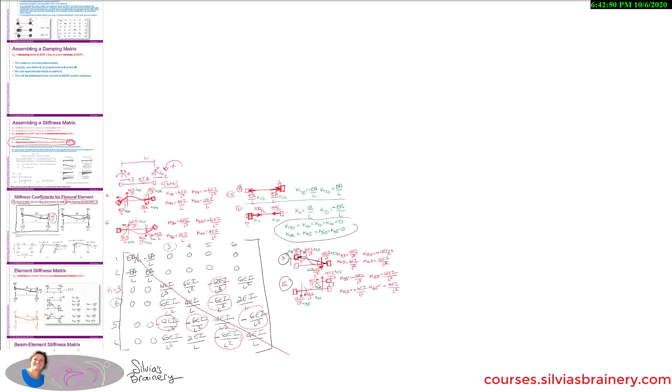So what I want to do in this video is the mother of all examples so that I don't have to spend so much time trying to get this done. I'm gonna do it cold and I hope I get it right. That's all I can say, but at least it's about the process, all right?

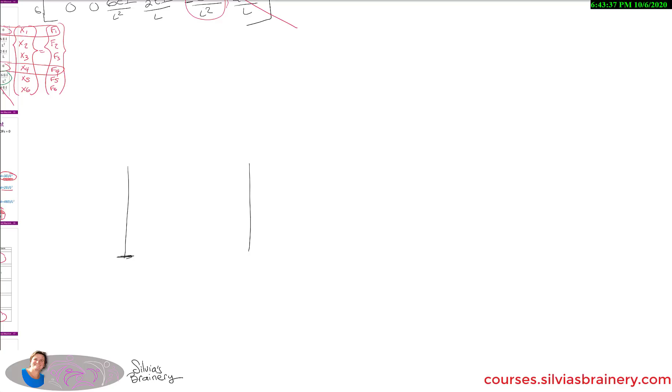So we're gonna do a 2-story frame, but it's gonna have all kinds of boundary conditions and connections and joints and things like that. Let's make the boundary conditions be: fixed at one end of the column, and pinned at the other end. We're gonna put hinges in this beam here, but a rigid connection here. The column spans all the way up with a rigid connection here, and then I don't even know if this is stable, and a system that looks like this. Yeah, it's good enough.

Oh, this is gonna be fun. I wonder if I can just uncouple them, but anyways, let me stretch that, draw this out just right. Just have to make sure that you don't have a mechanism, but this is almost like a cantilever and it's fixed here, so I'm comfortable with this system. And then the system here, it doesn't matter because it's connected to that one, so I think we're okay, and it's not statically determinate.

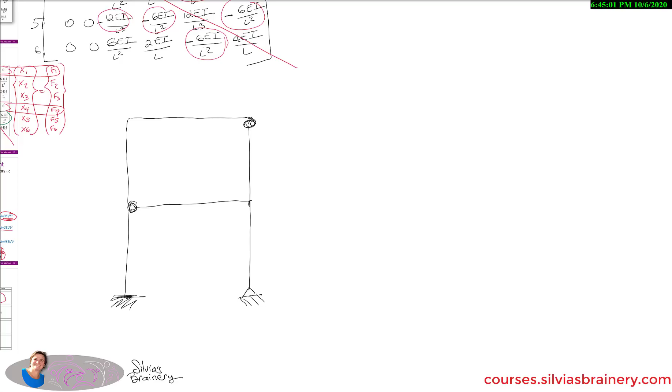I'm gonna make it that much interesting that I've got the I of the beam. You know what? Let's just call everything E's and I's, all right? Don't make my life that much complicated, because then those don't really matter, it just makes my equations that much longer. So everything is E, A, I, and L, all right? Everything is going to be a length, L from here to here, L, and this is L here. What really matters is the geometry here that I'm interested in.

So I'm going to include all degrees of freedom because that's just who I am. And my beams are not... could make one, oh let's do that. Okay, we're going to make this beam actually rigid. So I've got 1 degree of freedom less than I want. And oh, do I want to make that beam infinitely flexible? I'm just afraid that my system is going to collapse if I do that. So now I've got enough constraints here, okay?

So this is A is equal to infinity. So what are my degrees of freedom? At the base, I don't worry about those degrees of freedom. I'm going to take 1, 2, and then this is actually 3.

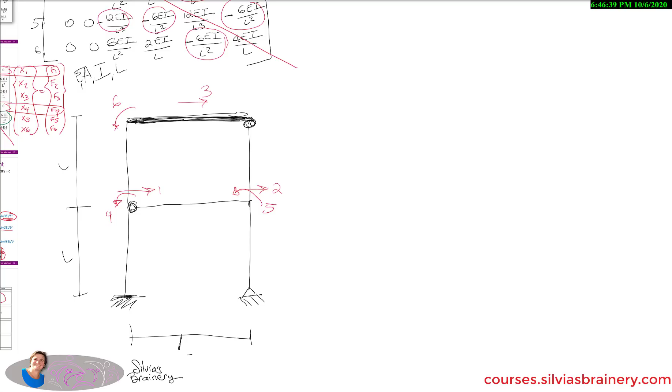1, 2, and 3. I'm going to do my rotations, rotation here. Whoa, 1, 2, 3, 4, 5, 6. And those are actually 2 rotations. And I actually don't even care about that rotation because, oh, and by the way, this is just A is equal to infinity, okay? It's not the EA. It's the only one just for this element here, okay?

And then let's just assign that as degree of freedom 7. All right, so we're going to go through. What I'm going to do is I'm going to show you all the coefficients and how we're going to compute them, but I'm not going to literally assemble the stiffness matrix in the end.

So let's deal with degree of freedom 1, and let's draw the deformed shape of degree of freedom 1. So what I like to do is I first draw the regular frame. It's going to be right here. And then I'm going to impose a displacement of 1 at degree of freedom 1. And then these guys are all going to stay where they are. This one's moving over here from where it was over here. No rotations or anything, all right?

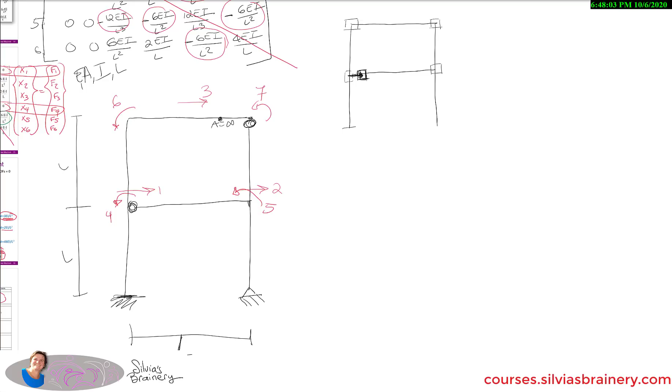So what are the forces acting here? Well, this is actually reduced. I now have to draw this guy here, and it's fixed over here, so I have no rotation here. I have this here, and I'm going to draw a deformed shape like this. This node here, I have a rigid joint, therefore it doesn't rotate here nor there. These all kind of stay the same. Actually, here's a pin, so it doesn't really matter.

And then here was a pin there, but the beam is pinned to it. So right now, for this degree of freedom, nothing matters there. And this is what the deformed configuration looks like. So this is for 1. I'm actually just going to do that as the first step. The degree of freedom 2 is going to be something similar but different. Actually, yeah, I'm going to draw the frame for 2.

Oh, I could just copy it. That's true. Now this is fixed here, but I actually do have a pin here. And therefore I take these nodes, and all these nodes are all going to stay where they are, except for this node that I'm going to translate 1 over.

What's happening here? Very important to keep track of what's happening here, especially with these, since I have a pin here and a pin here. So this guy's moved over, therefore I do have an elongation at this point. This rotation is actually free to move. So this is going to be the deformed configuration there. And interestingly, this is the deformed configuration here as well. This is a right angle, but this one doesn't have to be because it's pinned. Same thing at the top. And then everything else stays the same.

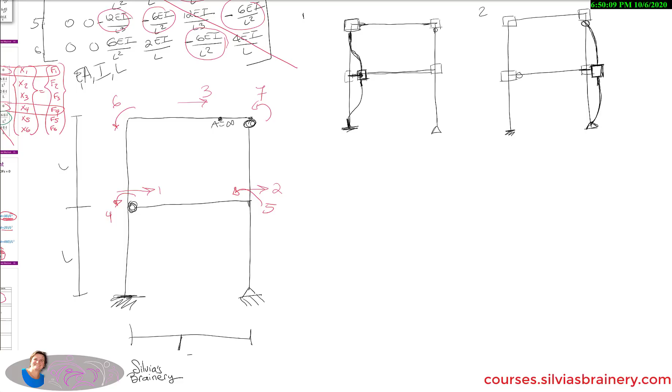Let's go to degree of freedom 1, 2, 3. I'm going to do degree of freedom 3. I'll just do it over here as well. My paper won't let me go all the way. Fixed, pinned. These nodes all stay.

Now, because I've got an axially rigid beam, this whole top floor must move over to the right together. And because it's got a connection there, that node can't rotate. Same thing with this node over here, it has only moved. Now I've got fixed here, so I've got an angle here and an angle here. That's what this deformed shape is going to look like. These two guys have moved together at the same amount. And there's no rotations there, so I don't have to deal with anything.

What happens here? Well, this now is the same thing. I have a pin here, so this is almost like an upside down cantilever, which is exactly the opposite almost of what I had here. And then this doesn't move.

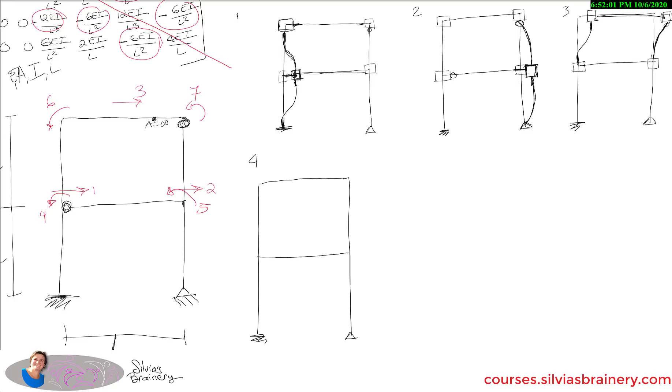1, 2, and 3. So where's degree of freedom 4? Oh, now we start having fun. So now we've got rotations. Yes, I am trying to make this all fit into one row, but I'm not sure I'm going to be able to make that happen. Remember, because I have a pin there and a pin there, and then I have a pin here. So degree of freedom 4 is going to rotate.

So this guy here, maybe it's easier if I draw it as a rectangle. This guy's going to have to rotate counterclockwise this much. This is where the column now is because it's rotated 1. This is where the column is now. This guy needs to stay, and same with this guy. So what this is going to look like is that deformed shape. This is fixed here.

Whoa! There it is. I left that behind, didn't I? On purpose. This guy's here.

This guy, I have a pin here. It doesn't matter what this is going to look like. And so what this is going to do, what the heck is this going to do? Ah, this is just going to stay here. If this doesn't deform and it rotates,

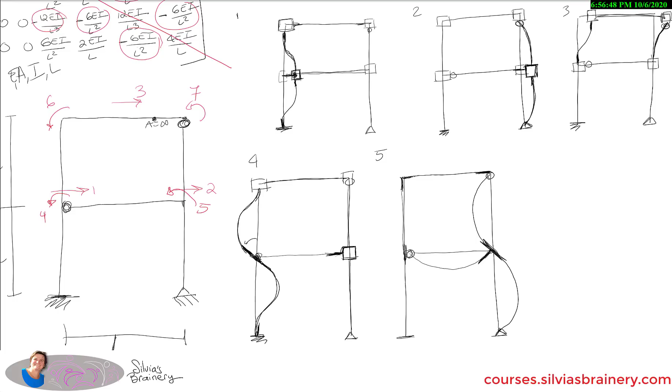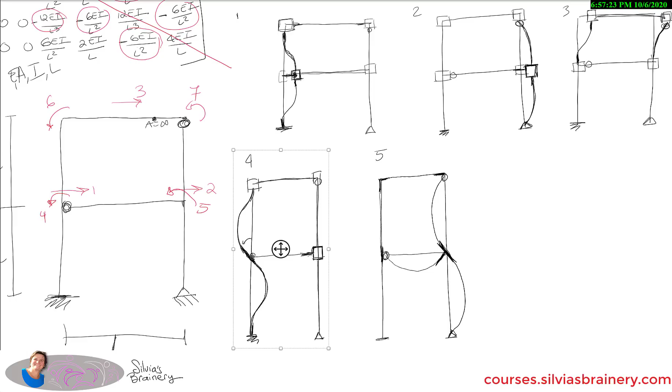Oh, this is so cool. All right, and then, oh, how am I going to fit 2 more in there? 6 and 7, all right. Oh, look at this, I can take this guy here now that he's done, and I'm going to move him over a little bit. Okay, good. Can I squish him in a little bit? Oh, look at that. No, stay. Handy, yes, I'm having a lot of fun with this. There it is, move over. This makes up for my needing space when I work, but not afterwards. All right, I got way too much room.

You gonna write? Pen, pen. All right, I'm gonna make this wide if I want. Oh, how did? Yes, for somebody who doesn't know how to draw straight lines, I sure am picky. But it needs to look right. It's so important because I base everything on visual. Fine, this is good enough.

All right, where's our degree of freedom 6? It's over here, so we're going to take this joint and rotate it counterclockwise to look like this. All the other joints are going to stay. Now here's a tricky one, because we have a pin, right? And so then this should be free to rotate, but no, because I've assigned a degree of freedom there. So that guy is not going to translate, or is not going to rotate. And we know it's not going to translate because degree of freedom 3 is fixed. So this guy's going to be here. We have a pin, this joint stays the way it's supposed to be. Same with this joint and everything else. So what we have here is this and this. And that's all there is to degree of freedom 6.

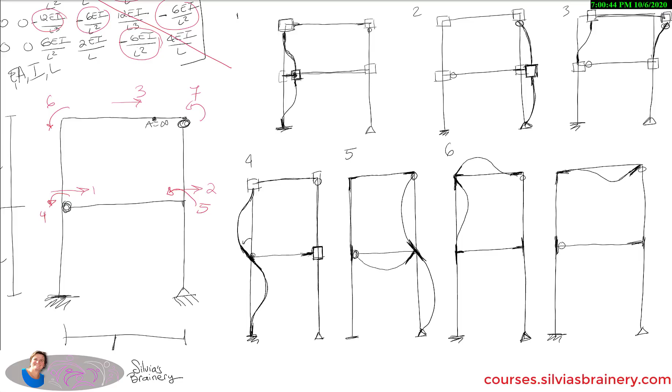Okay, so now we need to find out what our forces are, and we're going to have to go and pull out our table. So let's do these one at a time. And the figure that I'm going to pull out first is going to be this. So I don't know how to copy something over that's not an object. Because I can't... oops. Can I grab this? Nope. There's got to be a way of...

Ink to shape, shapes. Well, I'm just going to draw it again. There I am. So then I can take these objects. So if... oh, but I need to use the right pencil. Okay, let's go with red only because it stands out. So if we have this type of system where we then deform it downward, this is what our deformed configuration looks like. Ouch.

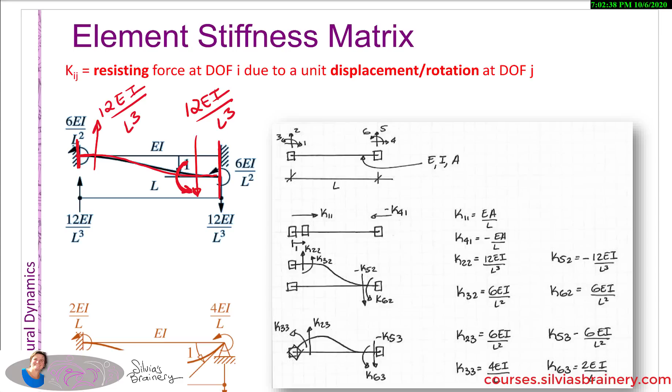And it's actually good this way because then I get to draw it the way I like it. The force here and here are going to be 6 EI over L cubed. No, they're not, are they? They're going to be 12 EI over L cubed. This is going to be 12 EI over L cubed. The moment, this, I needed a force to push this down, and therefore I have a force pushing this up to keep it in place, and equal and opposite. The moment is here so that I can keep this rotation angle 0. So I have a moment in this direction, that's going to be 6 EI over L squared. And I have a moment here that's 6 EI over L squared.

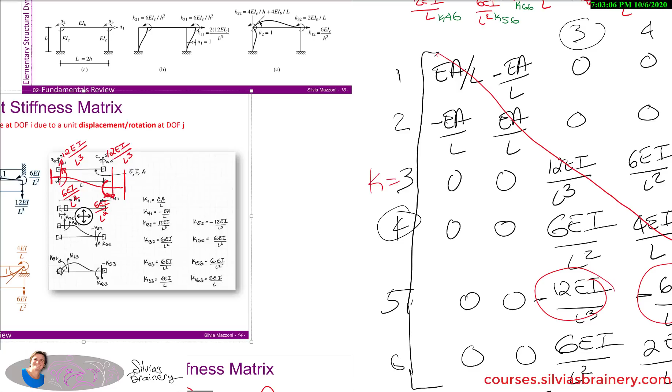All right, I'm going to grab these equations, or what I've drawn. I could make them a different color, but that would just be way too much work. No, no, no, that. Oh, look at that, I've just taken that with me. But no, let's not do that. I did so much work to make these look really good. So, no.

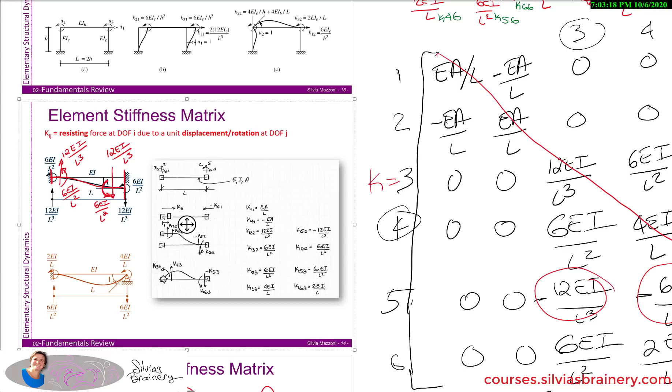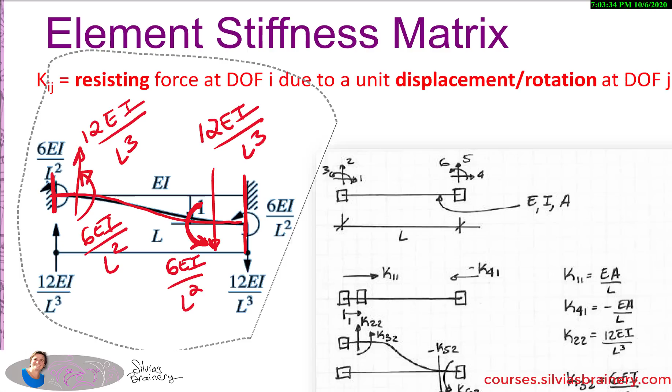I need to select something else. I don't want to select that. I think I need to go here with my little arrow. Select this, guys. Now I'm going to zoom out.

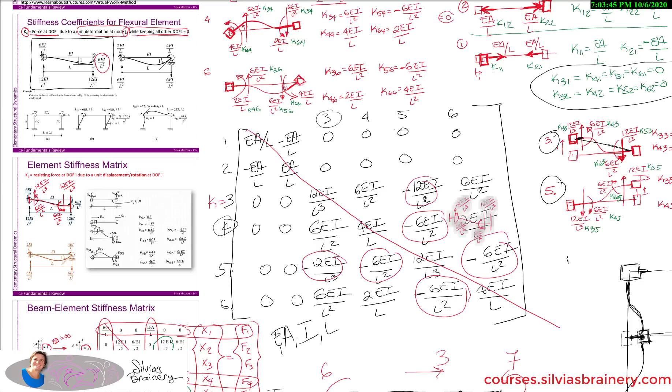I had all that room to the right. I'm going to take these over to here. So let's find out here, where is it that I need these kind of forces?

Aha, right here. So I have a force here and a force here. I have a moment in this direction and a moment in this direction.

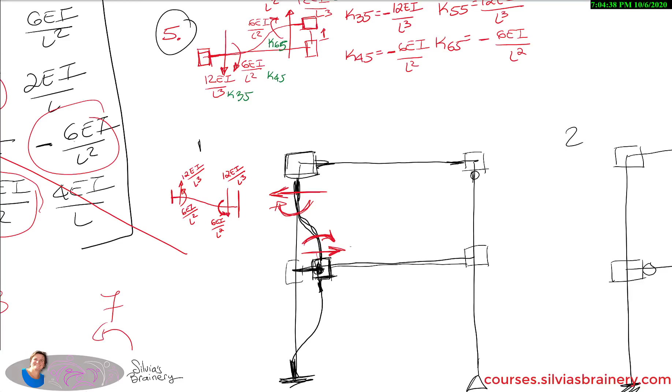I don't care what the figure over there looks like. I know that I need a force to displace it here. Therefore, I have a force in the equal and opposite direction there, and this moment is there. Otherwise, this would form a straight line, so these two moments need to keep it in the right shape, where I have zero rotations.

Just by symmetry and intuition, I have a force here and a force here, but I don't care. And I have a moment here. I don't care here because that's not part of my stiffness matrix. It's a constraint degree of freedom.

So these values are going to have 6 as the moment and 12 as the forces. So this is 6 EI column over L column cubed, because I'm not going to put them in, so at least you'll know L column 1. So it could be something different.

And this is 12 EI column over L column 1 cubed. This is, so if this is L1 and this is L2, and blah blah blah, then this force here is going to be 12 EI column, I could even say column 2 over L column 2. So this is column 1 and column 2 cubed. And this is 6 EI column 2 over L column 2 squared.

Same thing with this. This is going to be 12 EI column 2 over L column 2 cubed. And this is 6 EI column 2 over L column 2 squared.

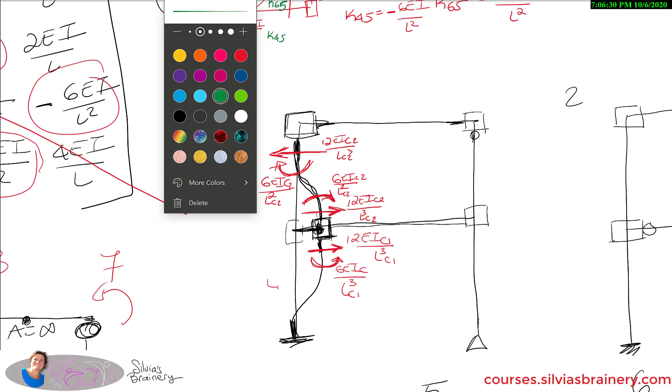What I'm going to do is put sign conventions right away. Let me find a different color. Green is the same color as red for colorblind folks, so I'm going to go blue. So this here is negative, this here is negative, this here is negative. And this here is positive, this here is positive, this here is positive.

So what do you do at a joint? What this is telling me - and I'm not going to do all of them, I know you're going to get the pattern here - this is degree of freedom 1.

So K11 is going to be, the combination is going to be equal to 12 EI column 1 over L column 1 cubed, plus - you've got to sum all the forces that correspond to degree of freedom 1 - plus 12 EI column 2 over L column 2 cubed.

And that one's easy. Now, what degree of freedom is this? Oh, I forgot, another force. What's another force that's acting on here? Haha, I did this on purpose and then I forgot.

We also have a force here of EA beam over L beam. And this is there, and then this node would move to the right as we're moving that one. So this force here is also in this direction. And so to this K11, you would also add plus EA beam over L beam. See that?

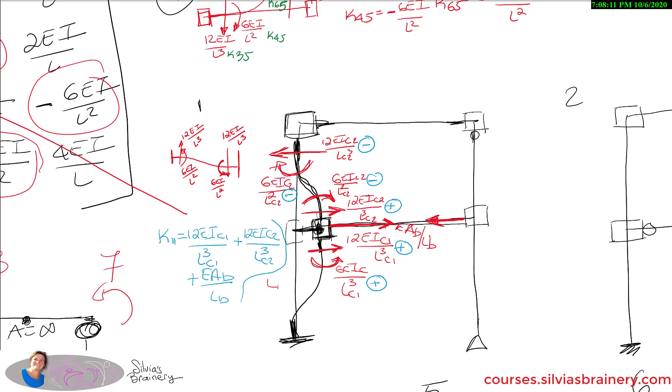So this is all K11. K, whatever degree of freedom that is. So K21, this is K21. K21 is going to be equal to negative EA beam over L beam, which is - that's K2. I'm trying to figure out what that degree of freedom is.

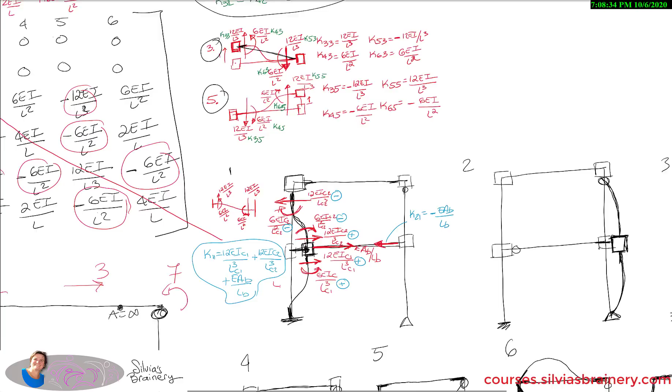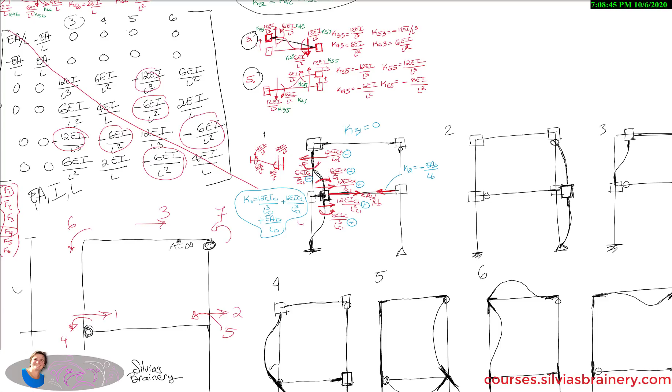1, 2. So K3 is 0. K31 equals 0. K41 gets fun. K41 is equal to the sum of the moments. Well, one's a plus and one's a negative. So it's going to be 6 EI column 1 over L column 1 cubed minus 6 EI column 2 over L column 2 cubed.

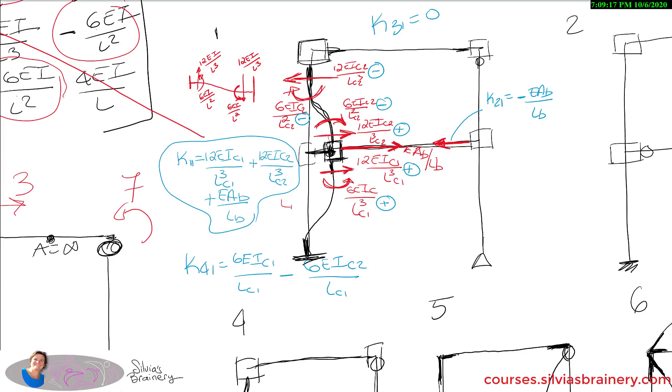Is it cubed or squared? It should be squared, yep. I can erase this - I like the idea of having a pen that is erasable. So that's K41. Where's 5? K51 is 0.

And K61 is... oh wait, I do have a... K31 is not equal to 0. K31 is actually this value. So it's negative 12 EI column 2 over L column 2 cubed. And then...

K51 to 6. K61 is equal to this moment, and it's negative 6 EI column 2 over L column 2 squared. That's it, 7. And then K71 equals 0. We got them all.

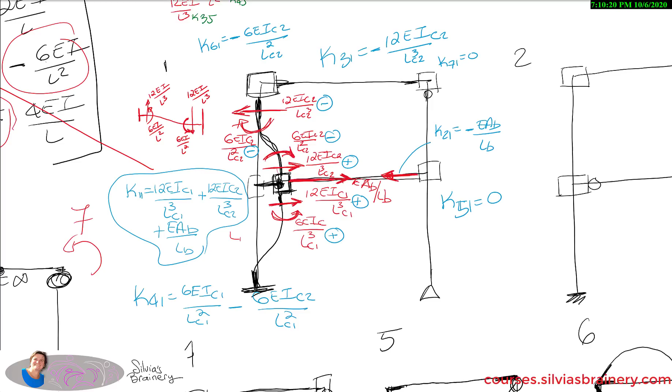All right, well let's move on to the next ones here. What are these forces here? Well, this is when we pull out a different equation book. Don't let me forget that there's a force. Let's put this one in right away before I forget.

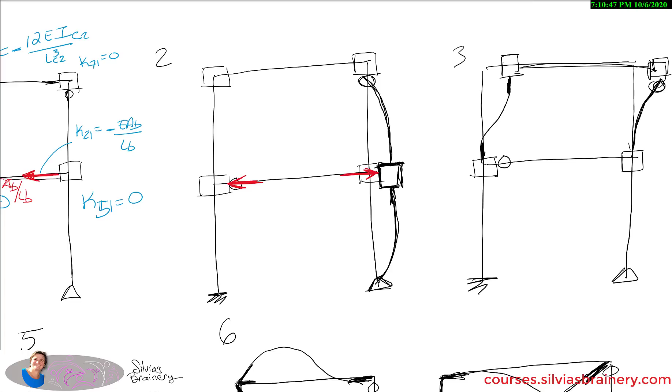So this force here pushes it out. This guy will go with it. And therefore there's a force of that. That's EA, okay?

Where am I? I see, what I need to know is what is the force here, and we can kind of already know what it looks like. There's a force that's going to be here and a force that's going to be there, and a moment that keeps it that way.

And see, then here I'm like, okay, what is the direction of this moment? It's got to be in this direction, only because the two moments have to cancel each other out.

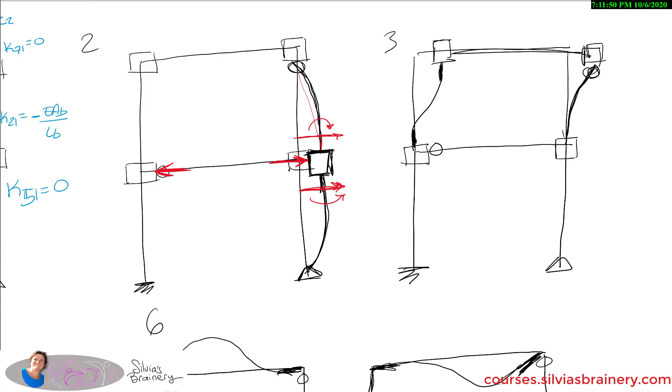Or not, I don't know. I would think... no, they don't have to, because there is a resultant moment actually at that spot. But it's a way of, if this goes up, this would actually move like this, and therefore I have to apply a moment here that's going to make this angle go at a right angle. So that's why that force there is in that direction.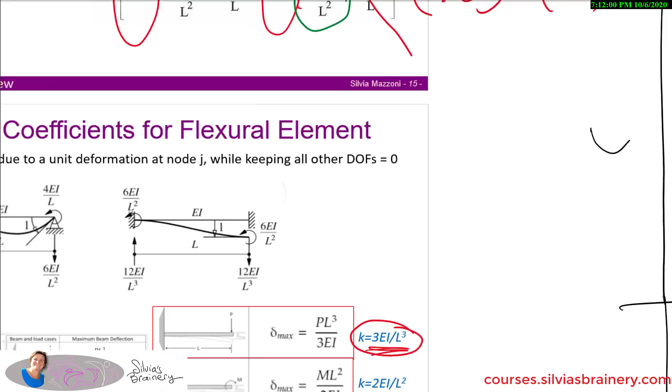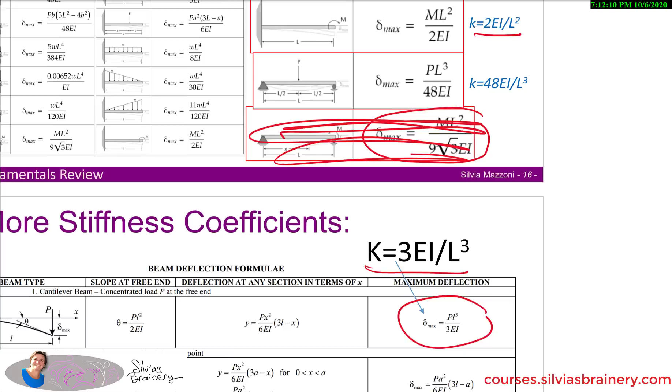So this is when you go to your other resources, other tables, because this system here doesn't quite fit. This is that 3EI over L cubed, which is hard to see it here. And I don't actually think that that's the one you want to deal with, but yeah, it is the same one. Okay, because this is the same deformed configuration as what we have over there. You've got a fix at one point and then free to rotate at the other.

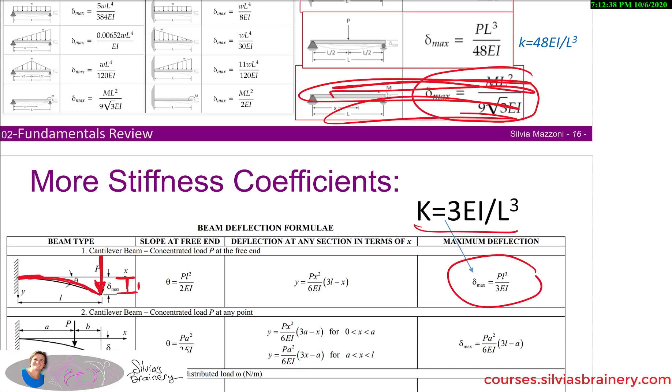We have a deflection of one here, and therefore the force here is going to be equal and opposite to the force here. So if this is P, and that's equal to 1, I'm going to show you how I'm going to get P. Then this is also P here. If this is P there, then the moment there is P times L for equilibrium.

All right, but now we got, what is P here? Well, we know that the deflection delta is equal to PL cubed over 3EI. Therefore, the force is going to be 3EI over L cubed, which is equal to the force. That's the shear force, okay?

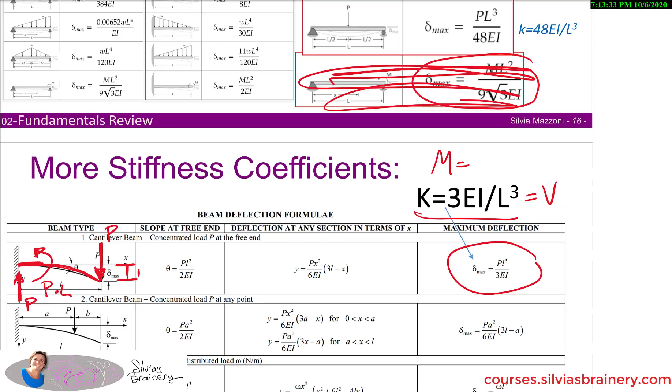Or let's just call it a V. The moment is going to be equal to this times that, so it's 3EI over L squared. And I think you can do that by...

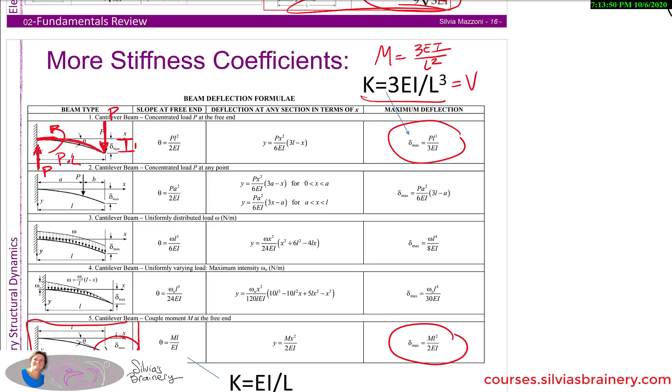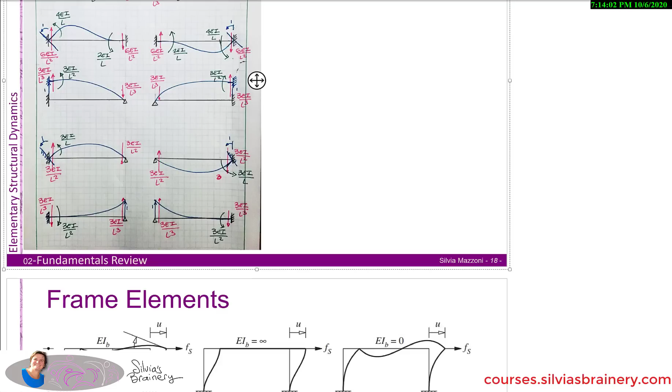Oh my gosh, I don't have this, because I think you have to do the one for the rotation, and I don't think I have that option, because that's why I put these into this sheet here. That's kind of like a summary of it, but it's pretty much what this looks like is so we have to find this configuration.

You can find this in tables online, all right, but it's the same kind of concept that I had there. So when you have a zero deflection and a free rotation at the other end, okay, so when you start with something like this... I'm really good at tracing my own things. So then the force is going to be 3EI over L cubed, and the moment is 3EI over L squared.

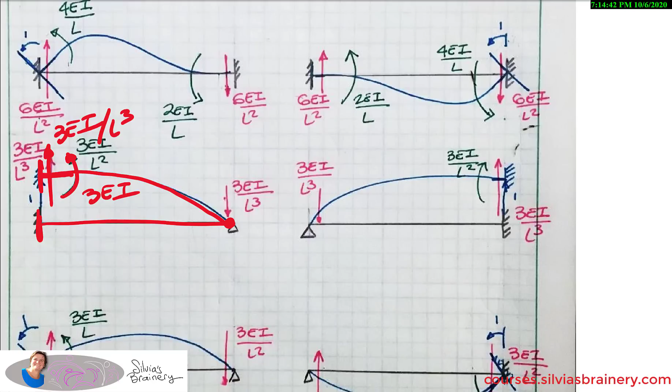So let's grab this, zoom out. Oh no, and I lost it. Now I've got the whole figure, so let's do that again. What have I done? Did I move it? Yes, I did, that's what I was afraid I'd done.

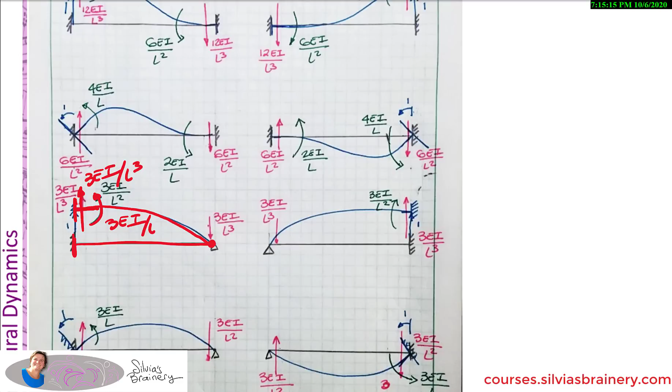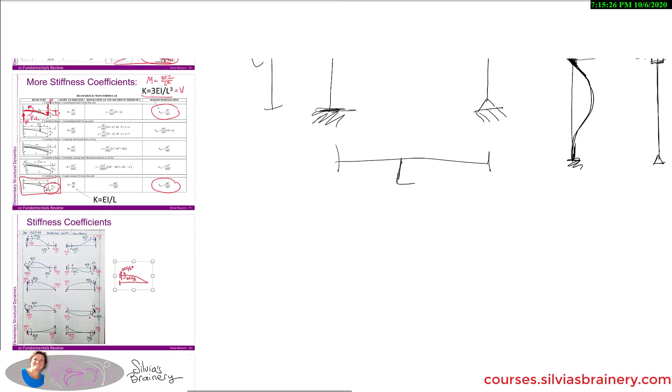Okay, so I'm going to zoom in right here. I'm going to grab it. What's there? I'm going to first move it out here, then it's easier to deal with. Then I'm going to move it to where I want it. It's so tiny. It's okay, I can make it bigger. Is there a... oh, I wanted it over there. Yep.

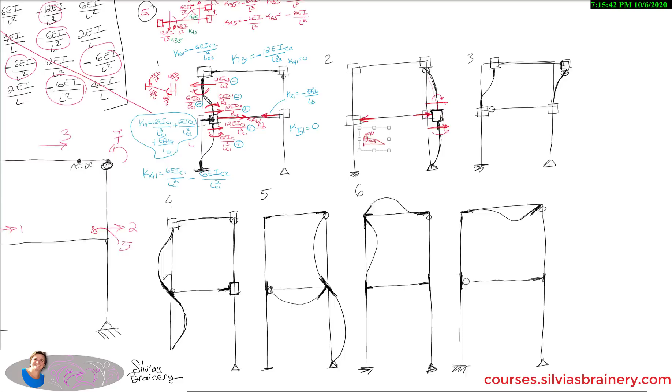All right, and this is relatively easy to remember anyways. So the force here is going to be... whoa, that should be squared, stop. Because it's just P times L, just based on equilibrium. This is also P, but we don't care.

Oh yeah, this is also 3EI over L cubed, all right? We don't care about the force here, but we know the moment is going to be 3EI over L squared. The force here, and this is column 1, this is 3EI column 1 over L column 1 cubed.

Here the force is 3EI over L column 2 cubed. This is column 2, and this is 3EI column 2 over L column 2 squared. But we also have a force here, because otherwise this would have been different, so we do have a force acting here that's equal to 3EI column 2 over L column 2 cubed.

Signs: this is negative because it's clockwise. This is positive, which is better be positive. This is EA beam over L beam.

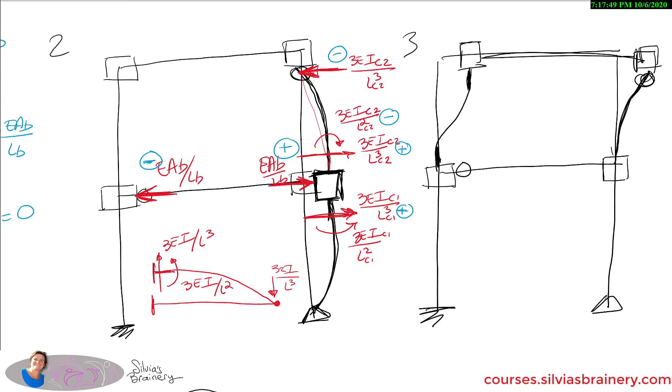Very good. Over there, we're going to need... where did I put it? This guy here. I think we can just see it from here.

At this point, I'm hoping you're familiar with this. We got a force here and a force there, a bending moment here and a bending moment there. Here we've got a force, so we have a force here and a force there. There's nothing from the beam because it's all moving together, and there's a moment here.

Nothing here, nothing elsewhere. So this is going to be 3EI over L squared. This is 3EI over L cubed. This is 3EI over L cubed. And this is going to be 12EI over L cubed. And these two are going to be 6EI over L squared.

Sign conventions. Positive. This is positive. Why is this force at an angle? I don't like this force at an angle.

Force is in this direction, therefore it's negative. This force is negative. This force is counterclockwise, it's positive. And this force here is positive, and better be, because that's a degree of freedom that we're moving.

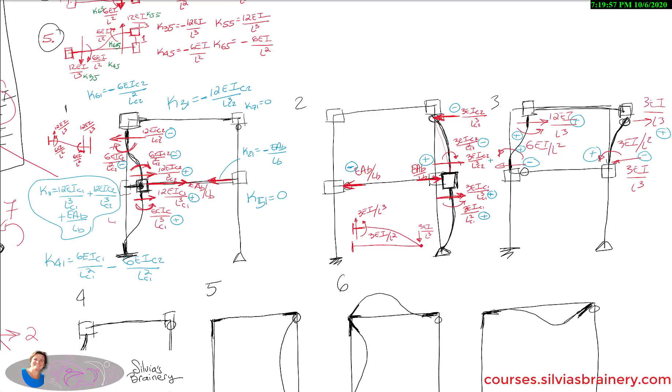So for the beam, for the degree of freedom here, it's 1, 2, and 3. Degree of freedom 7, for example, will be this value. It's a good exercise if you want, or at least just make sure you could do this part blindly, because you're never going to have as complicated a problem as I've set up right here.

Oh, I did have all this room to the right, so what I'm going to do is grab this guy and move him over. Let's see if I can do this like this. Can I stretch you? Yeah, okay, there it is. And I didn't write... whoa, what have I done? Okay, I haven't saved this at all, so I'm a little nervous now.

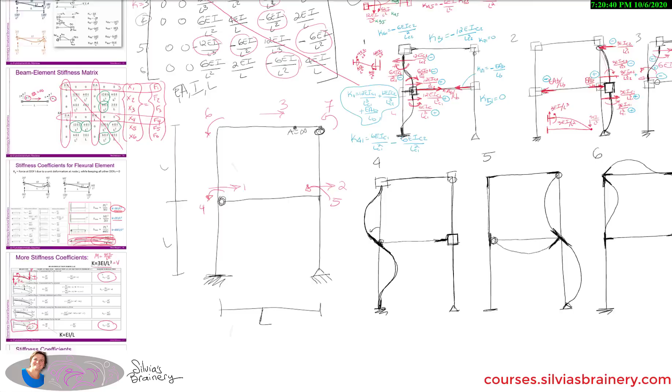Oh, I'm in draw. This needs to be a 7 here. All right, let's draw forces here. It doesn't get easier, it only gets a little bit more complicated, okay? So for this guy to be in place, we need a force like this, otherwise that would have gone flying over there.

Same thing, that angle needs to be kept in here, this in this direction and in that direction. We have forces in this direction and in this direction. These are those EI over L terms, okay?

So this is rotation. This is 4EI over L, and this is 2EI over L. This is 4EI over L. And then the forces are the 6EI over L squared, 6EI over L squared, 6EI over L squared. And same thing with here.

So it's interesting - if the properties were the same, there's 6EI over L squared. But these are different column lengths or different column properties. If they're the same, then those two shear forces will cancel out. Let's look at the signs here.

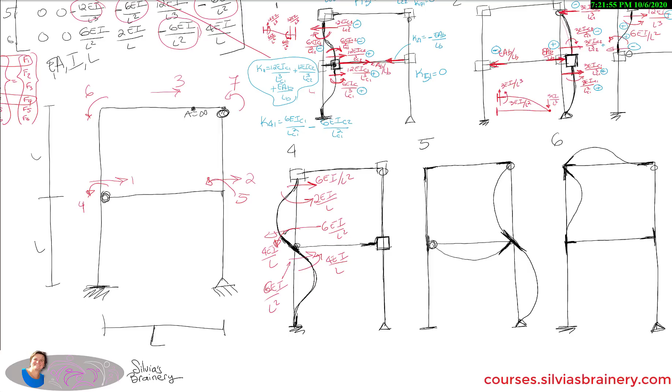Oh, and I got those from... I skipped a step here because I kind of took it for granted. I've talked about this in a different video. When you've got this system, it's fixed, but then you impose a rotation here and no rotation here. This is what the deformed configuration looks like. Yes, mine is a little bit more accentuated than the real one.

Look at that, I could almost trace it. I like to accentuate just because it helps me visualize things better. So we have a moment here of 4EI over L, and in the opposite direction, to keep it in place, is 2EI over L. It's not symmetric when you're dealing with moments.

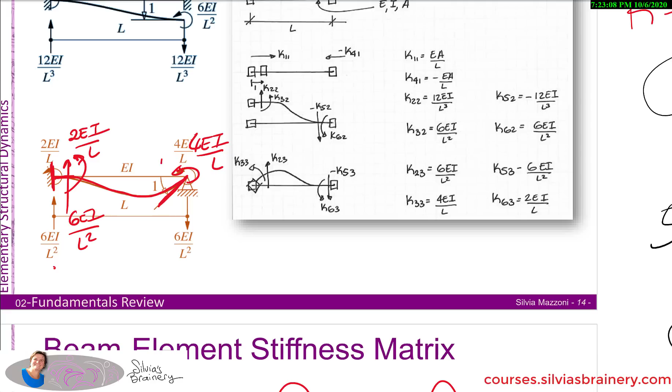On the other hand, to keep this rotating, to keep this node in place, because otherwise if you rotate here, this thing would just kind of end up here. So you need to apply a force, and I like to draw it over here, of 6EI over L squared. And same thing, you have an equal and opposite force of 6EI over L squared.

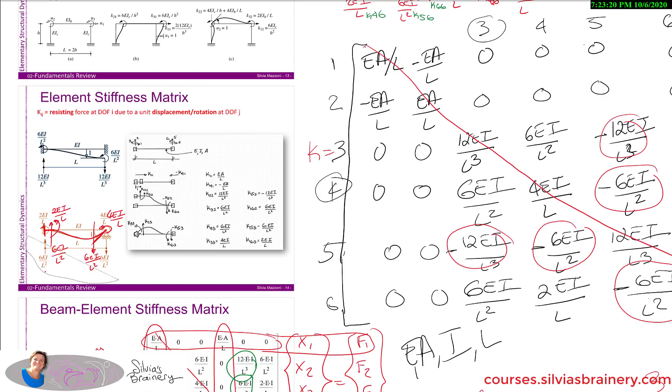So what I'm going to do is grab these guys and move them out.

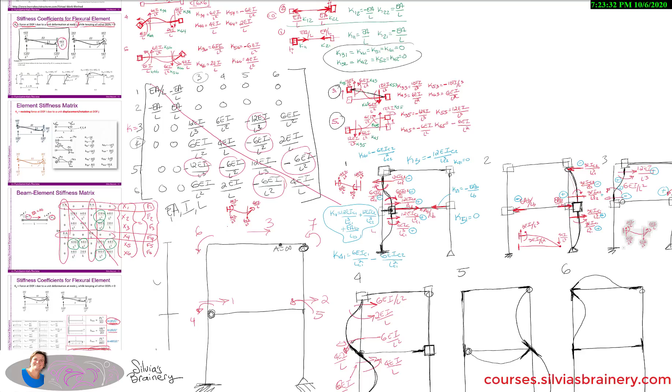These are the terms that I used right down here. I'm going to put it here because I'm going to need this for this guy too. So that's what I used here. Same kind of relationships

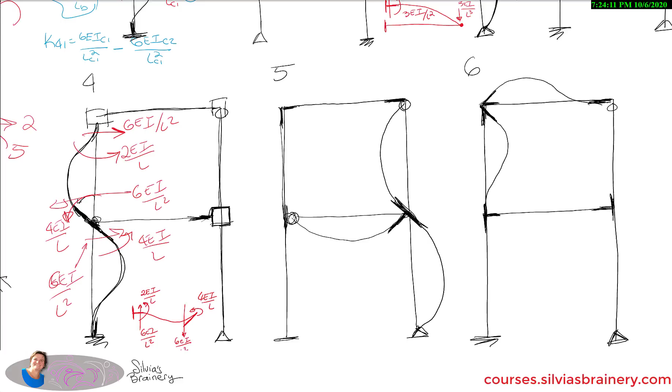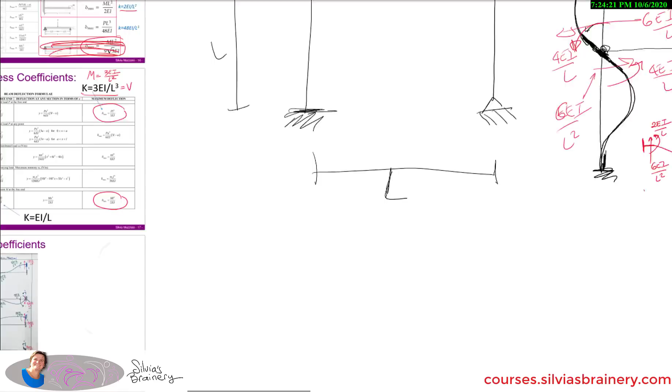that I use there. This is different now, and I need to find the stiffness term here. In all of these cases, as you can see, I have a rotation here, but then I don't have fixity at the other end. I have a pinned connection, so I need an even more difficult and different type of relationship. And that one is the one that I have. That's why I did all these different stiffness coefficients.

I hope I have it. It's literally in a simply supported beam. There it is. Okay, so if you have a simply supported beam that is pinned and fixed here, it doesn't matter, and you rotate this. If I impose a rotation here, this thing is able to rotate just like a simple beam.

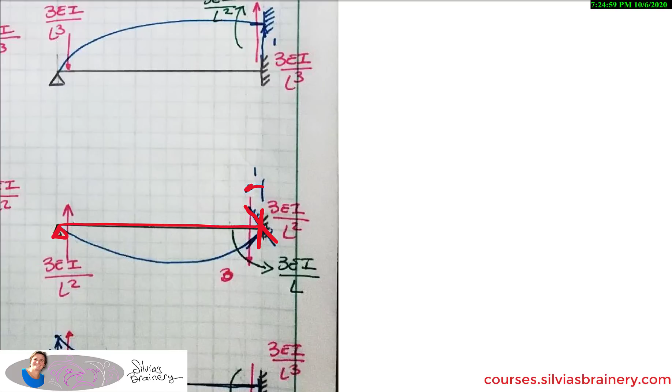This was this type of joint connection, and if I rotate this by an angle of 1, now this is going to look like this, but this is free to rotate as well, so this is what my deformed configuration looks like.

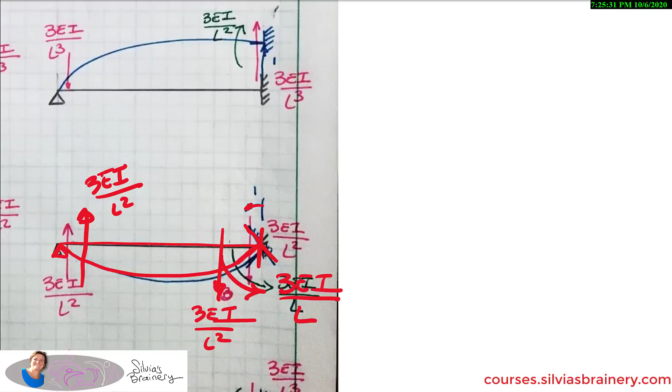The moment here is 3EI over L, and the force here, so I need to apply a downward force here of 3EI over L squared, and therefore I need to put an equal and opposite of 3EI over L squared. Remember that we saw the 3EI over here, so it's always good to remember the symmetry between the forces and the moments and the components. It's a good way of checking to make sure you're doing it right.

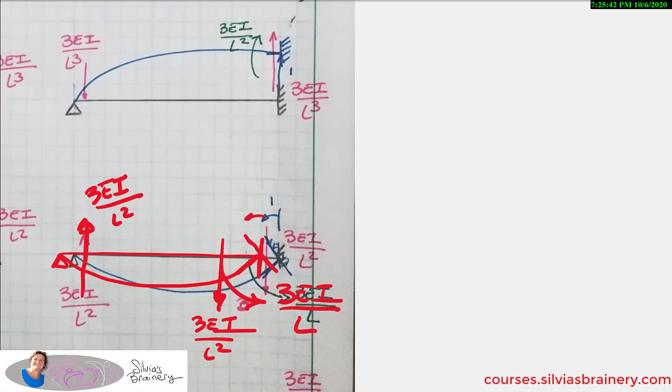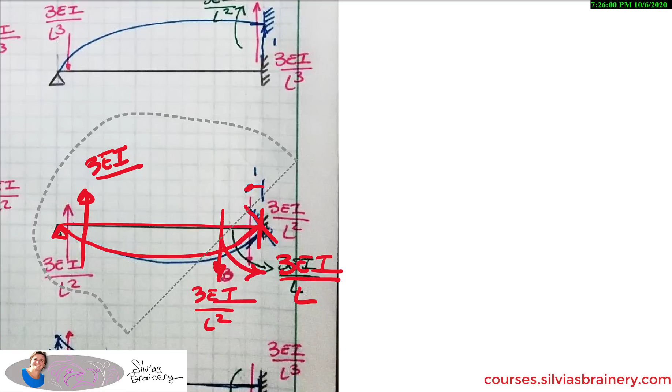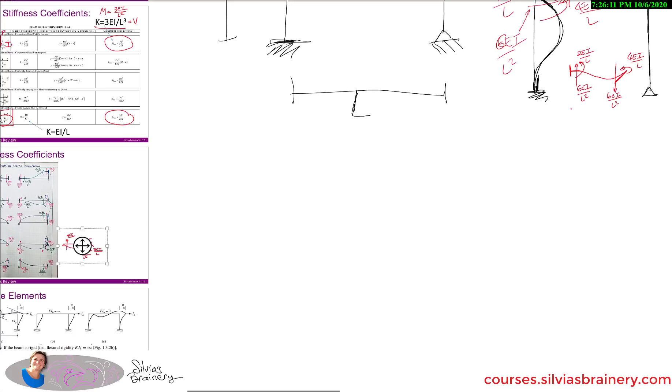So what I'm going to do is I'm going to take the wrong thing. So I'm going to pick that, pick something else. There it is. Okay, so now I'm going to grab what's here. I'm going to move it out of this box, and I go and put it where I'm supposed to be putting it. I don't think I grabbed it. Oh, I did grab it. Okay, where did you go? Where is it that I need you? I need you right here.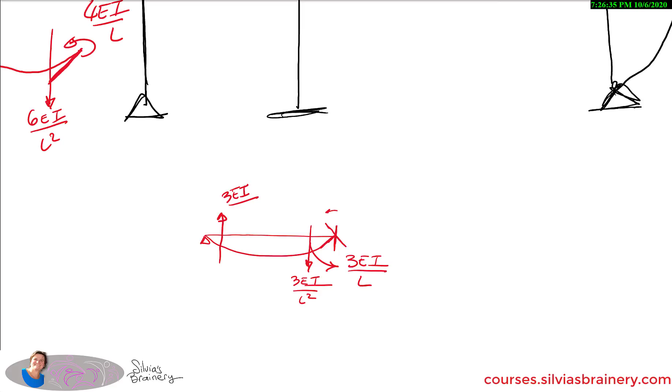And so that sheet that is there that we were just looking at is really the answer key to everything. So I'm going to take you, make you a little bit bigger, and move you over here. All right, now we're in a good place to go back. Oh, I didn't do the sign convention before, but I'll do it afterwards. I'm on a roll here.

So now I'm going to draw the forces. I know this is a moment that needs to go this way and that way. Now the forces are going to be tricky, and it's always like, well, wait a minute, in which way do you do it? Well, as you can see, the force is in the same direction as the deformation. But it shouldn't be like upward. Oh, no. Okay.

The force is going to be in this direction. Oh my gosh, I have a force here, but I didn't even worry about that degree of freedom. And I should have accounted for the axial deformations of the columns and things like that.

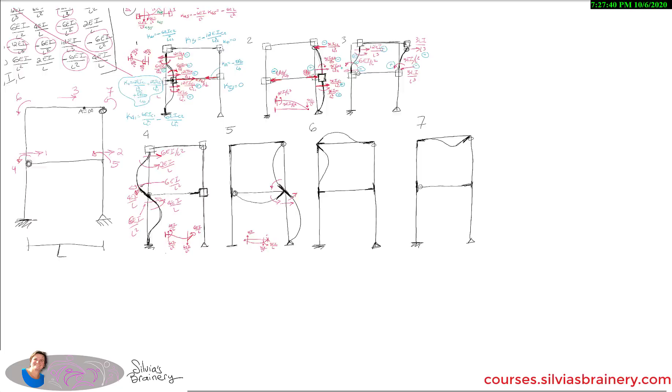But it doesn't really matter at this point. This was just an exercise, but I should have included... I'll do it in a different color. I should have included that degree of freedom, and that one, and that one. All right, so those are going to be 7, 8, 9, and 10.

And until now, they didn't really come into play, but they're all related to each other, because that's where the beams come into play. This is the one case where we actually have a downward force on the beam that's resisting the rotation, but we're just going to neglect it for now, but I'm going to put it in anyway.

So here I have a force in this direction, but I haven't dealt with that degree of freedom, and there's that force. And then is there a force up here? Yes, because it's got to keep it in place, and then I don't care about the force here, and there's no moment there because I'm on this side of the beam, and therefore the beam isn't moving.

So this term comes in because this is your K7 term. So these are all 3EI over L something, either L squared or L. So this is 3EI over L. The moments are all 3EI over L, but they're all different E's and I's, okay? So we've got 3EI.

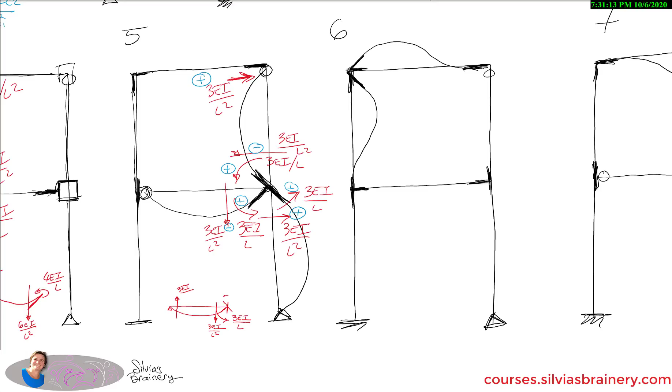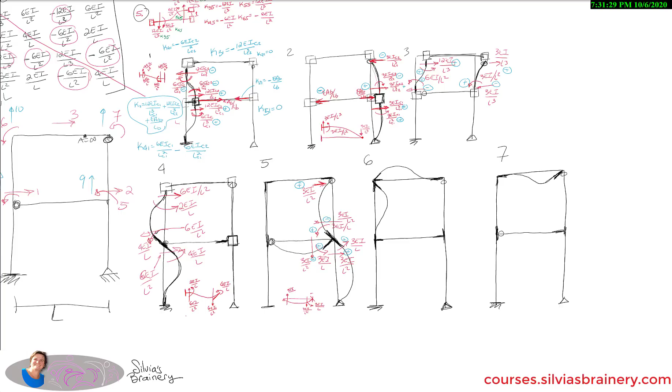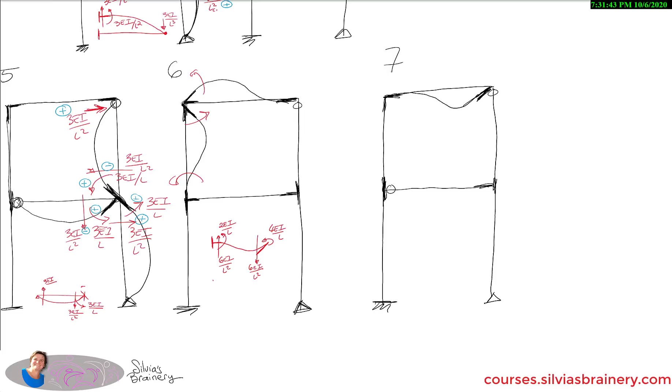They may or may not cancel because you may have different EIs. So doing this by hand just kind of gets complicated. I don't need this relationship in these. I think here, because I've got back into this, this is the relationship that I need. I'm going to bring this here. So what am I doing? I've got a moment here and a moment there, a moment in that direction, a moment in this direction. And that's what's good about this exercise.

Aha, look at this. Now that we start rotations, there's another degree of freedom I didn't consider. Got a force here. There's the other degree of freedom I didn't consider. There's a force here and there's a force here. And these are the ones that correspond to these rotations.

So it's 4 for the moment. So this is 4EI over L. This is 2EI over L. This is 4EI over L. That's 2EI over L. And then the shear forces are 6EI over L squared. So that's 6, blah blah blah. This is 6, dot dot dot. And this is 6 and 6EI over L squared.

The sign is what I'm really interested in. If this degree of freedom had been considered and I would have made it positive up, those would have been positive and negative. That's counterclockwise, so that's plus, that's a plus, that's a plus. So look, I've got 2 moments you got to add up, and I do have a shear in this degree of freedom, all right? And that's a plus, so that's for this horizontal degree of freedom. I do have a value. At this node, I have this value here, which is negative, and here I have positive.

It'd be exciting to put this all together and see if I got all the sign conventions right. But again, this is really about the exercise of going through and drawing the deformed shapes. I cannot guarantee that I've done any of this right, but I'm actually confident that I've done this carefully enough.

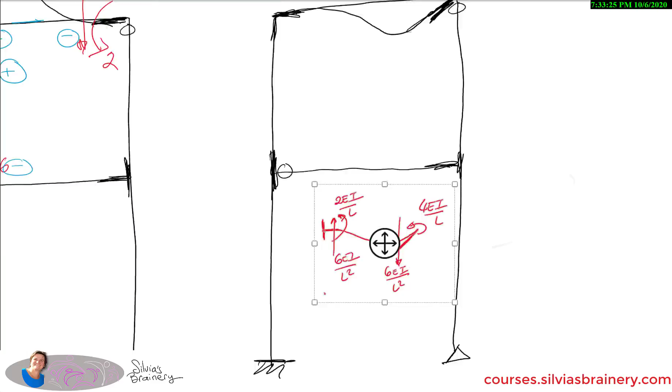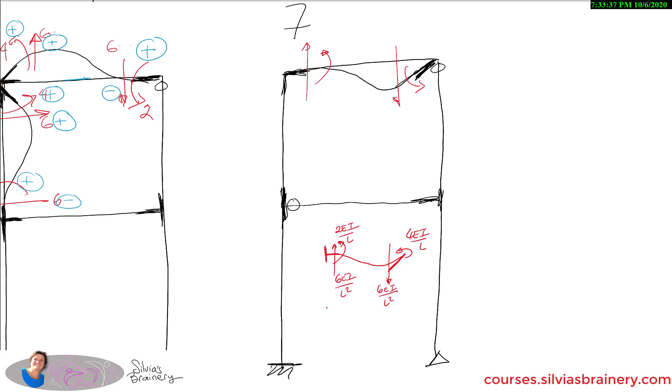Look at this. We're almost done. So what do we have? We have a moment and a moment. We have a shear force and a shear force. This thing didn't rotate because we got a pin right there. Nothing else happened anywhere else.

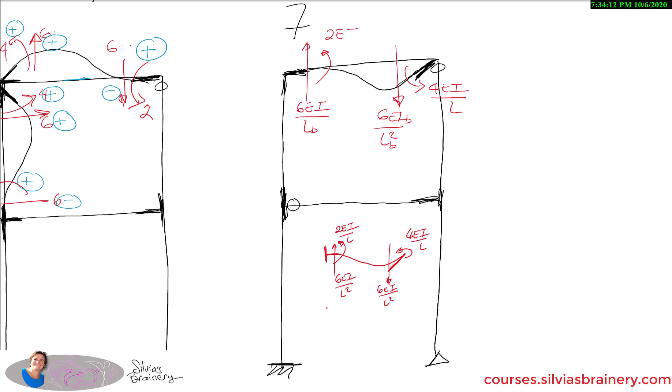So this is 6EI over L squared beam. This is 6EI beam over L beam squared. Not that one, this is this force here. 6EI L beam. And then where we impose the rotation is 4EI over L. And then this is 2EI over L. I made it this far. These are going to be 2EI over L.

This is 2EI over L here. For the moment, I'm going to make this moment longer, and I'm going to make it 4EI over L, 4EI beam over L beam. This is column. And then this is 6EI column 2 over L column 2 squared. And then this is 6EI beam over L beam squared. And this is 6EI beam over L beam squared. I think I got them all there.

Figured I made it this far. Let's deal with those sign conventions we got. There's a positive moment. That's a positive moment, which is really good, because that's where we apply the displacement. This is negative. This is positive if I pick those sign conventions, and that's it.

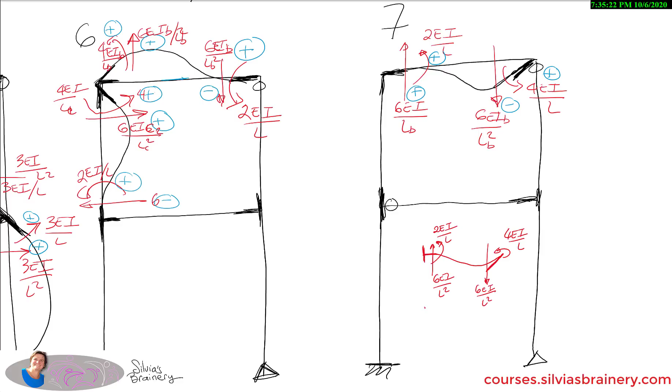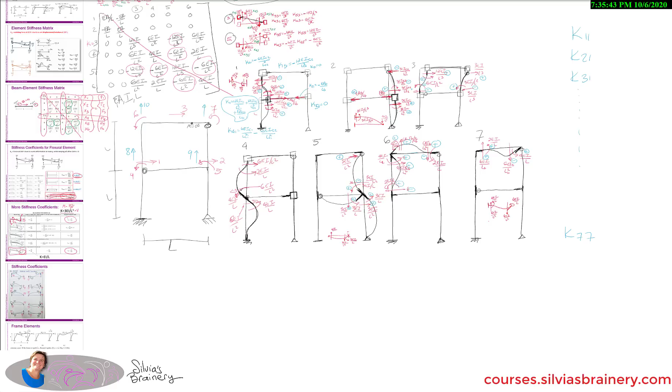We've assembled. And now you literally put in a table of K11, K21, K31, and you keep going all the way to K77. And this is nice because this box here corresponds to that box. And then you got the second set from the second degree of freedom, and so on until the last degree of freedom. You put these all together, and then now you put these into a matrix, K, which is a 7 by 7, and it's got to be symmetric.

And that's it. You've assembled the stiffness matrix. The second part would be to do static condensation or solve the problem as you need to.